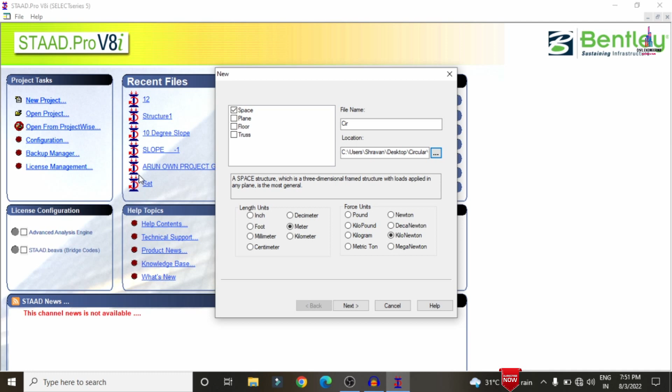Before that, initially we need to select the units, which are meter and kilonewton. Click on next. Now we have to select the add beam command. Click on finish. Now the grid lines will open in STAAD.Pro V8i, consisting of 10 grid lines in the horizontal direction as well as 10 grid lines in the vertical direction.

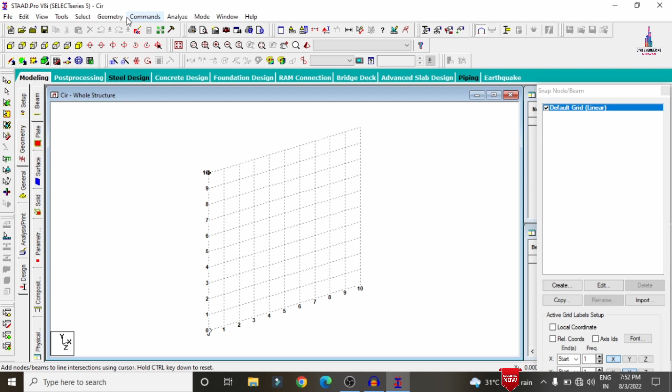Firstly, we need to model the 3D model for the building structure. Go to the geometry option, click on run structure wizard. Select the model type, frame model. Select the bay frame. Initially I am assuming the length of the building is 15 meters. For the height, I am selecting a G+7 building model consisting of 8 stories, 8 multiplied by 3, which is 24 meters. So height is 24 and width is 12 meters.

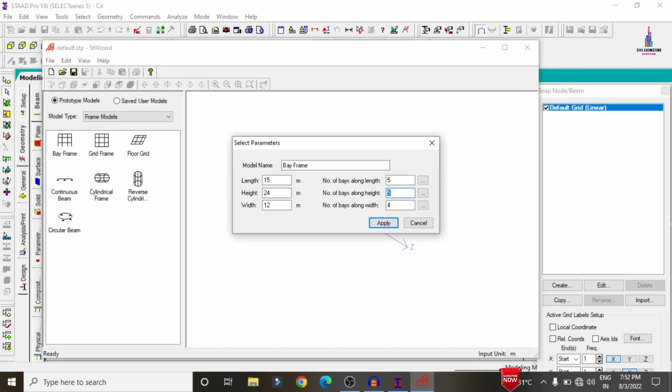The number of bays along the length direction will be 5, these are 8, and again these are 4. Click on apply so that the 3D skeleton model will open like this. Now we have to import this model to STAAD.Pro from the structure wizard. For that, click on cancel, then click on yes, click on OK. Now we can see the model was imported to STAAD.Pro like this.

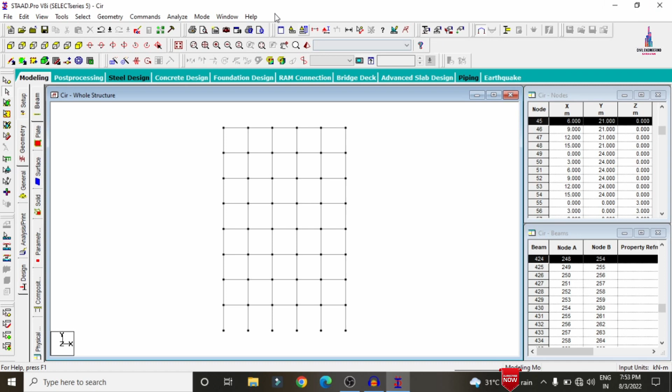Before applying the load cases, we need to add the slab section for this structure. Firstly, click on the front view option. Go to the cut section command. I am selecting the top. Click on the selective view option, click on OK. Here I am selecting this portion of the building structure. Now I am adding the slab section for this.

For that, select add 4-node plate. You can add with the mesh also. I am selecting the mesh option to add the plate cursor. Select the starting point, second point, third point, and the fourth point. Again I am coming to the first point like this. Select any type of mesh depending on your loading distribution condition. Here I am selecting the quadrilateral meshing option.

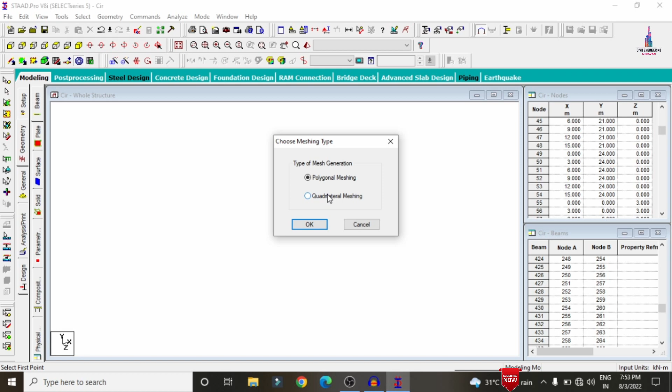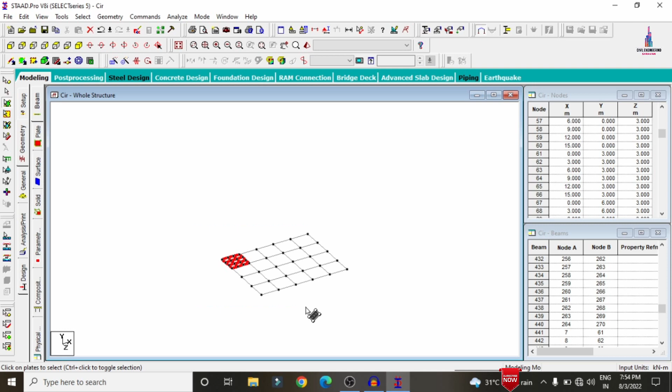Click on OK. We have to select the number of bays or divisions required for the mesh. I am selecting 3, 3, 3, 3. Click on apply so that it applies the 3x3 mesh property for the slab. In the same process, we have to copy this mesh to the X direction as well as the Z direction. Select this section, click on the translational repeat option. We copy in the X direction for the remaining 4 steps, selecting 4, of 3 meters. Click on OK. Now in the same process, we have to copy to the Z direction.

Further select all the property of the slab. Click on this particular option, select in Z direction, which is consisting of the 3 numbers, each will be consisting of 3 meter. Click on OK so that it will model this respective structure here like this.

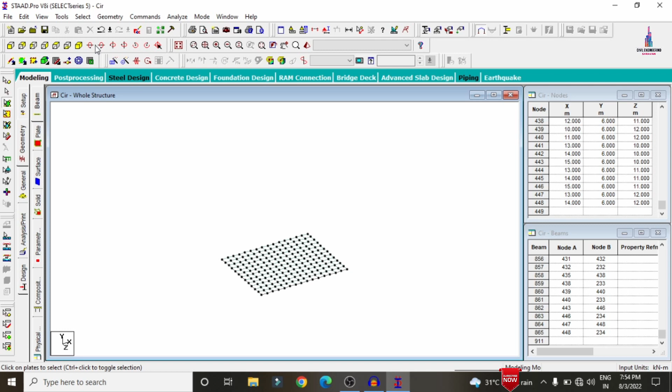Now we have to copy these properties to the height direction. Select this slab section, select this particular portion. We have to copy this slab to the remaining steps, which is of 1, 2, 3, 4, 5, 6 here.

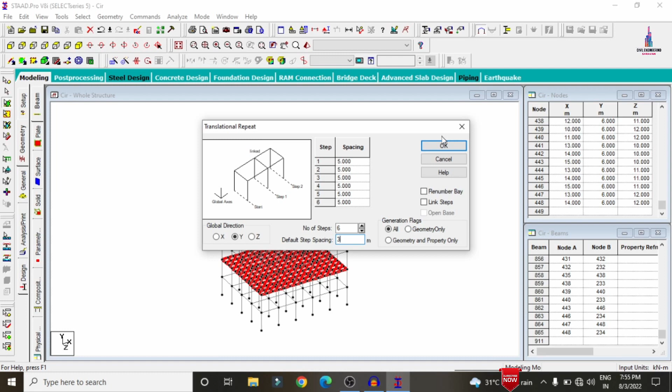Go to click on the translational repeat, Y direction. Number of steps are consisting of 6 numbers. Each step will be consisting of approximately 3 meter. Click on OK option. Now you can see it was copying the slab section to the remaining stories here like this.

Okay. So after modeling process completed, I will show you the 3D model which is done with the skeleton model. So click on the 3D rendering view option. This is the 3D rendering view which is loading. So this is a 3D rendering view for the structure.

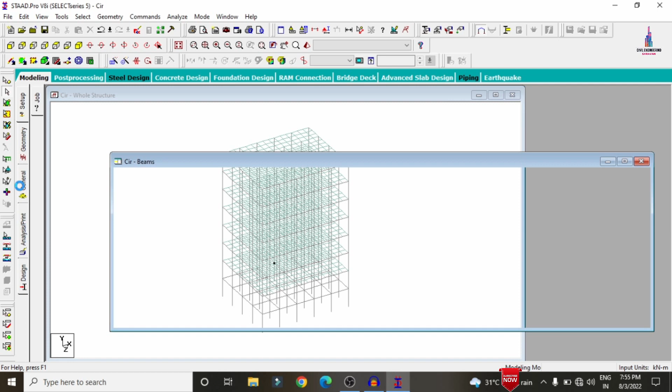Now we have to add the property which is related to the beam size, column size, slab thickness, etc. for the building structure. For that reason, we need to go to the general option here, and we have to click on the define option on the right hand side section. It will be consisting of the property assignment which is related to the circular, rectangular, T-section, trapezoidal, general, tapered I, tapered tube, assign profile. Just I am selecting the circular which is consisting of the column.

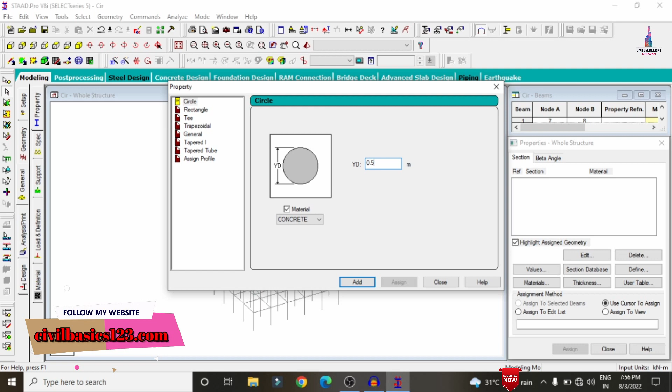Just I am selecting the diameter of the column will be consisting of 0.5 meter. Click on add option. Again in the same process I am selecting the rectangular beams which is consisting of approximately 0.5 cross 0.23. Just I am selecting the YD is approximately equal to 0.5 and this distance I am taking here as 0.23. Click on the add option, close option.

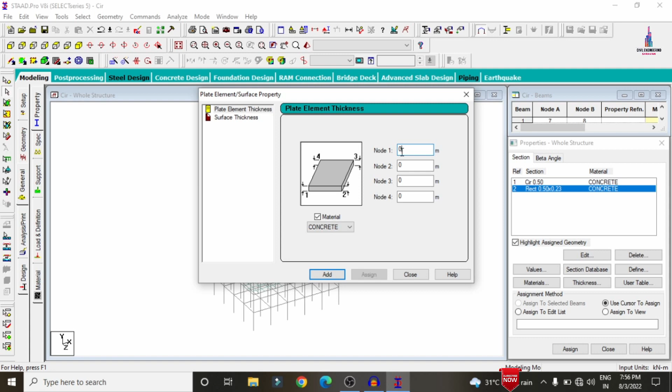Select the thickness option and we have to give the thickness of the slab. Just I am taking here as 150 mm. Click on close option. Select the circular column, go to select option, beams parallel to Y direction condition which is nothing but the vertical direction condition. Assign to selected beams option, assign option, yes option. So that it will assign the R1 property for the vertical member.

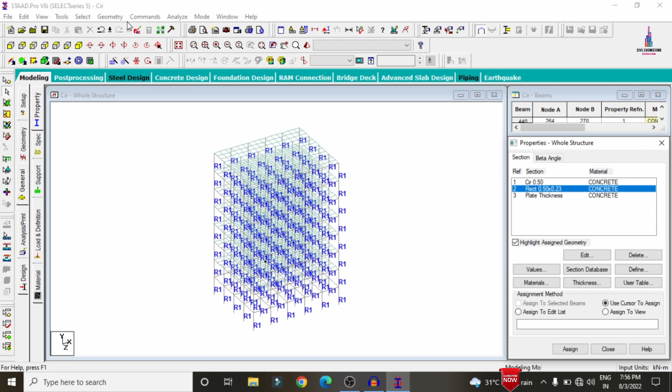Select the rectangular section which is of the beam, go to select option, beams parallel to X direction. Again I am selecting beams parallel to, let us consider, go to select beams parallel to Z direction condition. Click on assign to selected beams option, assign option, yes option.

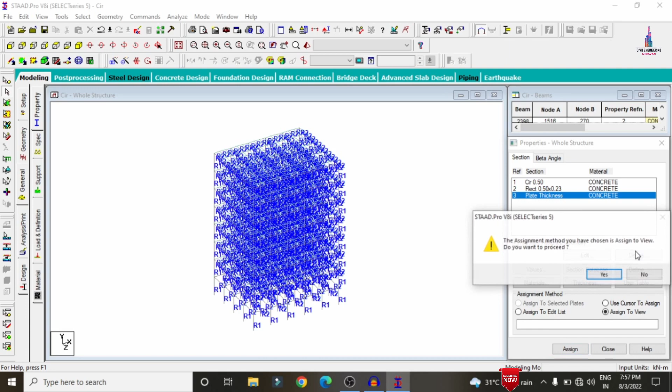Then after that we have to assign the plate thickness. Go to select this by using assign to view option. Click on the assign option, click on yes option, so that it will assign the plate thickness for the building structure. Now we have to see this model in rendering view again. Click on the 3D rendering view option. Now you can see it is loading the 3D rendering view.

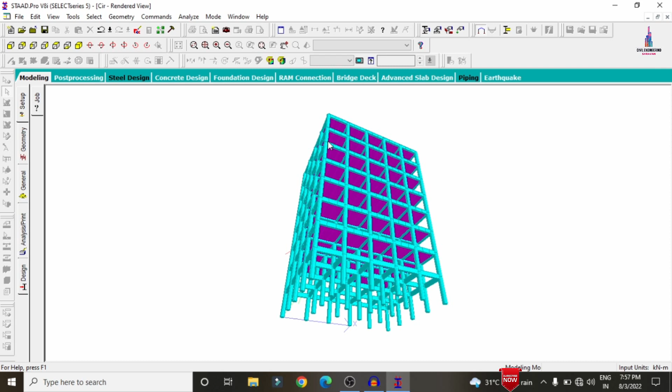This is the 3D rendering view for the building structure, which is consisting of the column size is approximately 0.5 diameter, 0.5 cross 0.23 beam dimensions, and slab thickness is approximately equal to 150 mm. So after modeling process completed, we need to assign the supports for the building.

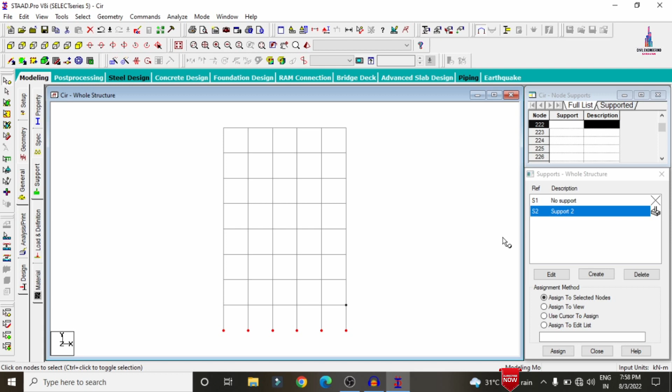For that, go to click on the general option, select the support option, click on the create option, add your fixed support condition, select support. With the help of the front view, select all the node points at the base. Click on assign to selected nodes option, assign option, yes option.

Now we have to apply the load cases for the building structure. Before that, we need to define the load cases according to seismic loading consideration and wind loading consideration as per IS 875 and as per IS 1893 codal provision. For that, we have to go to the definition part which is available on the top right of the section. Click on the definition, select the seismic definition, click on add option.

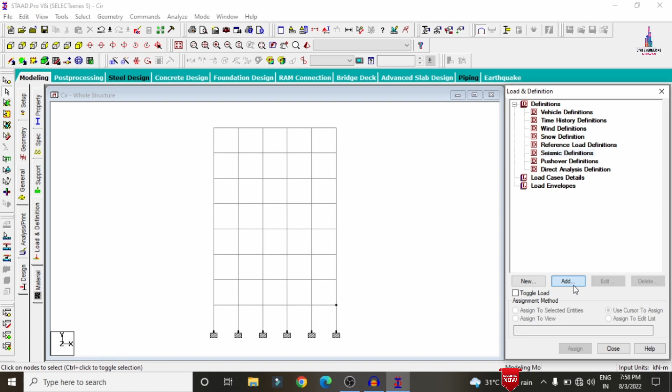So firstly, we have to select the code as per IS 1893 codal provision standard system. Click on the generate option. So firstly we have to select the zone which comes under the designing section. Just I am selecting the zone which is zone 5 seismic condition, otherwise you can select any one of the zone.

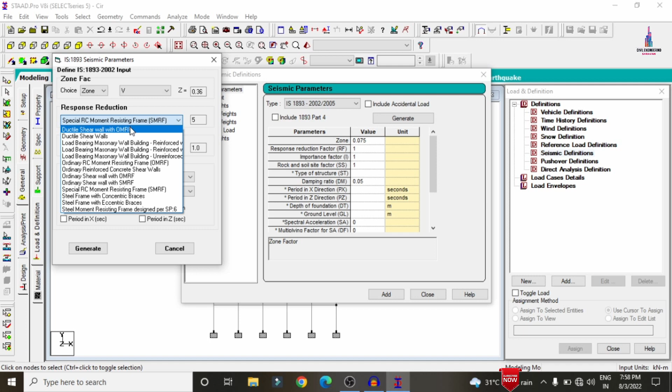So I am selecting here and select the response reduction factor for the special RC moment resisting frame. It will be consisting of the different types of the property, but here I am selecting special RC moment resisting frame. Importance factor will come under the general building structure which is of medium soil condition.

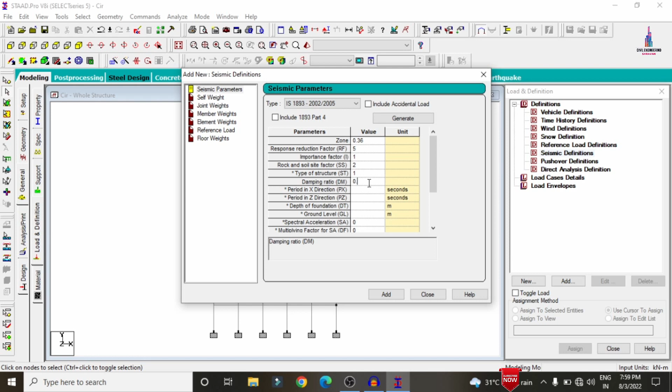Click on the generate option so that it will generate the property which is related to the seismic zone factor, response reduction factor, importance factor, rock and soil type. I am giving the damping ratio as 5%, which is 0.05. Click on add option. Now we have to add the self-weight condition system.

Click on add. After that we have to add the member weight, which is a uniformly distributed loading condition. So we need to consider the uniformly distributed loading condition which comes under the wall loads. Basically we will calculate the external wall. With the help of the external wall thickness, we need to multiply this value with the unit weight of the brickwork, approximately equal to 20. We need to multiply with 20 and we have to multiply this value with each floor height, which is

3. Again, if you want to calculate the internal wall, we need to take the internal wall thickness. We need to multiply this value with 20. Again, we have to multiply this value with 3, which gives 7.5. In the same process, we have to calculate the parapet wall loading condition also. I am selecting 0.125 as the thickness of the parapet wall, which is of 1.2 meter height.

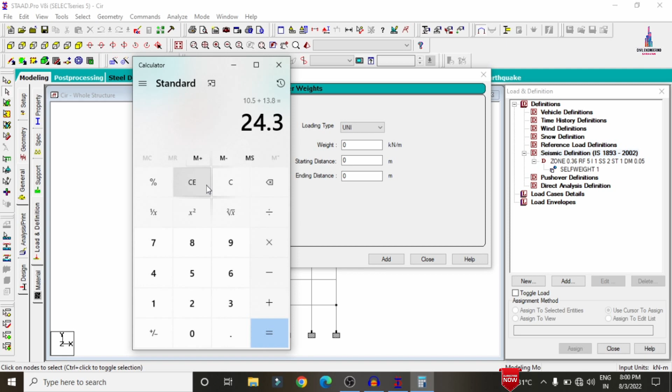We need to multiply this value with the unit weight so that it will obtain the value 3 for the parapet wall loading condition, 7.5 for the internal wall loading condition and 13.8 for the external wall loading condition. The summation of these values will be 24.3. So we need to enter the value 24.3 here. Click on add option. Now we have to select the uniform load which is 24.3.

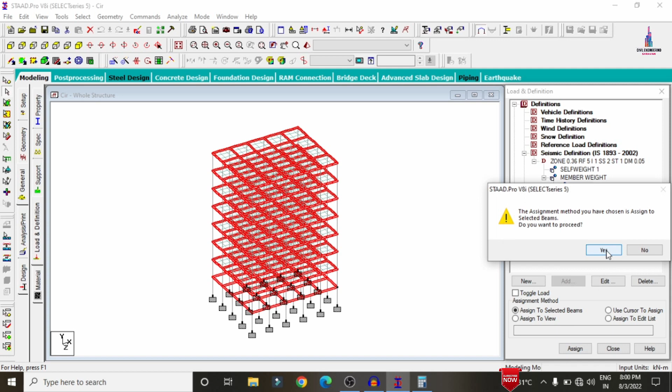Go to select beams parallel to X direction. Again I am selecting beams parallel to Z direction. Click on assign to selected beams option, assign option, yes option. After that we need to define the wind loading condition according to the consideration. Before that we need to measure the center to center distance for the building structure in the length direction, in the width direction, as well as the height direction.

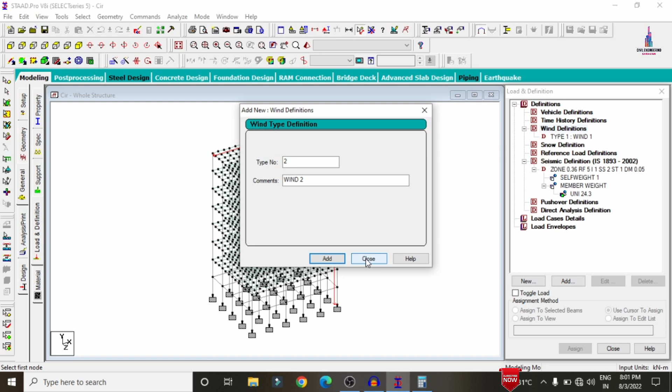Then after that we have to select the wind load definition. Click on add, select type 1 wind 1, click on add option, close option, select type 1 wind 1 here, click on add button. Firstly we have to generate this value according to the consideration, otherwise you can directly enter the value. I already explained how to calculate the wind loading condition according to IS 875 Part 3 code in my previous video. You can watch that particular video for the calculation part.

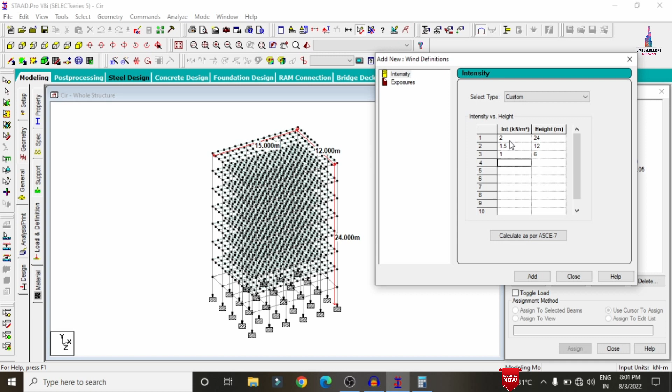So here I am entering the value according to my consideration. I am taking the intensity 2, which is acting at a distance of 24. I am taking 1.5 intensity which is acting at a distance of 12. I am selecting 1 which is acting at a distance of 6 here. Again I am selecting 0.5 which is acting at a distance of 3 meters here.

Click on add option. Select the exposure factor which is of value 1. Click on add. Again we have to close it. Select the exposure factor as 1 by using assign to view option, assign option, yes option. So after that we have to define the load cases. Go to the loads and definitions option, click on add option.

Initially we need to add the seismic loading condition, which is earthquake load in X direction. Click on add. Again I am selecting the earthquake load in Y direction. Click on add. Select the load which is related to the wind loading condition. I am selecting the wind load in X direction. Again I am selecting the wind load in Y direction.

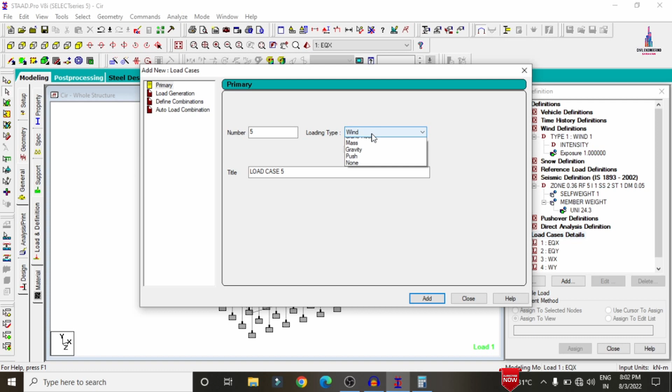Select the load which is the dead loading condition. Select the DL option, add button. Again I am selecting the load which is the live loading condition. Click on LL option, add option, close option. Select the earthquake load in X direction. Click on add. Select the load which comes under the seismic loading condition according to your consideration and X direction with factor as 1, add option, close option.

Select earthquake load in Y direction, click on add. Select the seismic loading condition from this input. Select the direction as Z with factor 1, add button, close option. Select the wind X, click on add. Select the wind load which acts in the windward facing direction with factor 1, add option, close option. Again in the same process I am selecting the wind Y, click on add option.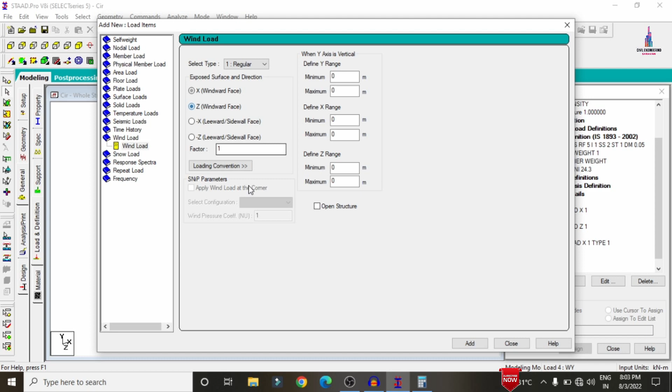Select this respective wind loading direction, which is Z direction, windward facing only. Click on add option, close option. Select the dead load. Under the dead load we need to add the self weight initially, which is Y direction -1 factor. Then after that we need to add the member loads, which is a combination of all the loads of the walls, which is 24.3, acting in Y direction.

Click on add. After that we have to enter the floor load. I am selecting the floor load, with an intensity for the floor of -2, acting at a distance of 3 meter as well as 24 meter. But here 3 meters is not an important value; we have to consider 6 meter. Why? Because our first slab exists at 6 meter height. Click on add, close. After that we have to select this self weight and assign to view, yes option.

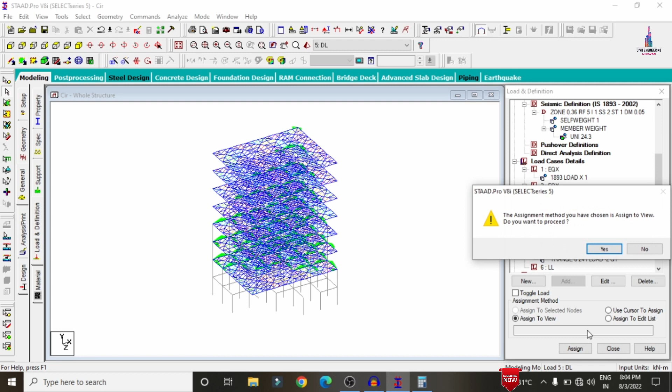Now we have to select the wall loading condition. Select the uniform load. Go to select option, beams parallel to X direction. Again I am selecting beams parallel to Z direction. Click on assign to selected beams option, assign option, yes option.

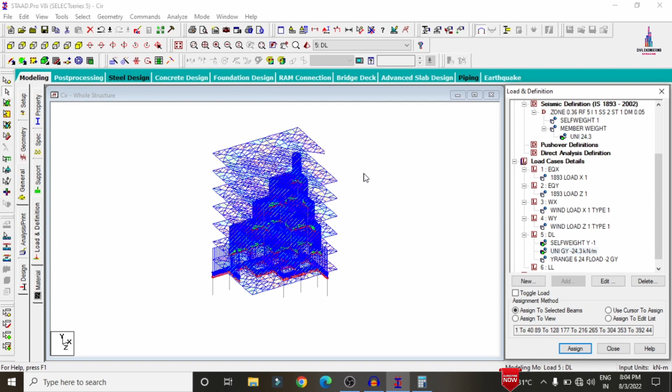Then after that we have to select the live load. Click on add option. Select the floor loading condition here. For the load, I am selecting -3, acting at a distance of 6 to 24 here. Click on add option, close option.

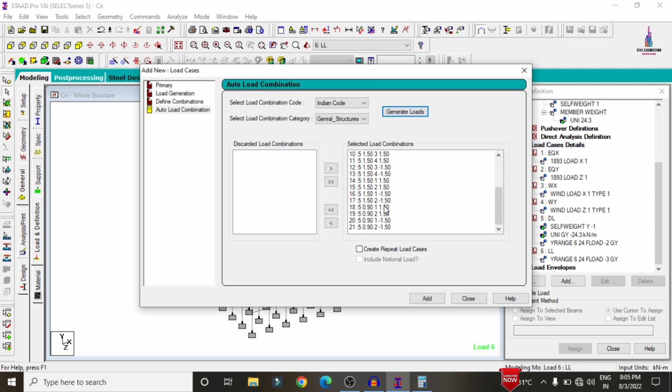Then after that we have to add the load combinations. Click on add option. Select the auto load combination according to the Indian standard provision. According to the Indian standard, click on generate option so that it will generate the load combinations like this. Click on add option, then click on close option.

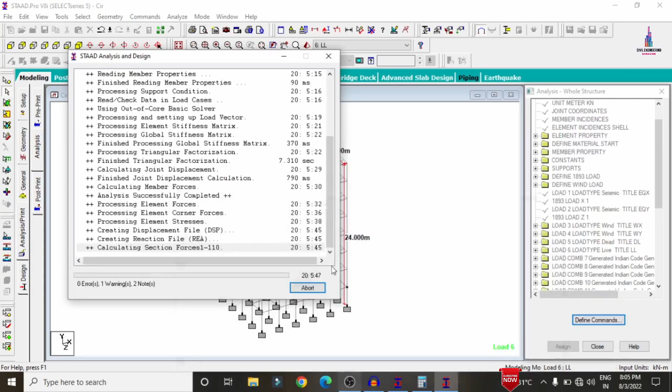Now we have to select the analysis and print option. Add no print, close option, analyze option, run analysis option, save option, so that it will do the analysis process according to the load cases. Now we can see my model is checking for 0 errors. The model has completed the analysis process. It is obtained with 0 errors.

Go to post processing mode option here, click on done option. Firstly, we have to apply the load cases that you need output for the building structural analysis results. Click on apply option, click on OK. Now we can see due to the live load, it is deflecting like this. You can select any one of the loading combinations, depending upon your consideration, so that it will display the green color diagram, which is the deflection diagram. This is the deflection diagram.

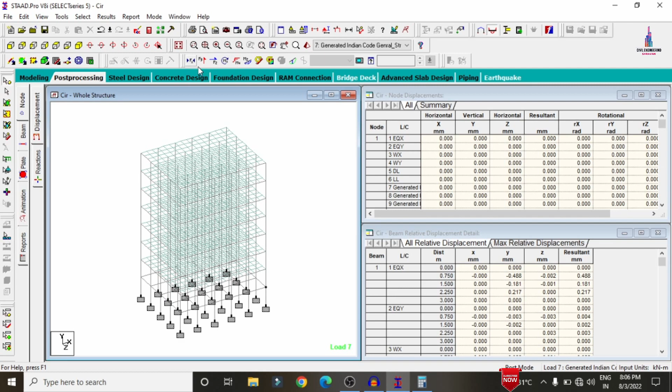In the same process, you can select the shear force diagram. I'm selecting the Fy value. This is the shear force diagram for the building structure. In the same process, I'm selecting the Mz value. This is the bending moment diagram for the building structure. Then we have to select the plate pressure distribution diagram. Click on the plate. Select the stress type as absolute pressure. Click on apply, click on OK. This is the plate pressure distribution diagram for the building according to the 7th load combination.

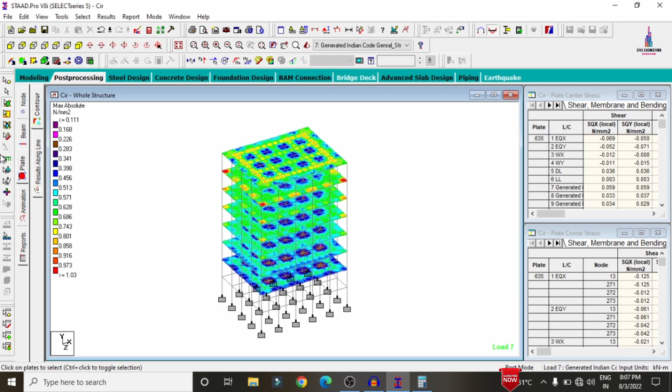After the analysis process is completed, we need to design this structure. Go to modeling option for that. Click on design option. Select the concrete design. Select IS 456-2000 codal provision. Click on select parameters. Firstly, we have to deselect all these parameters. Then we select the compressive strength, yield strength of shear reinforcement, maximum main, maximum secondary. Click on OK option. Now we have to select the define parameters option.

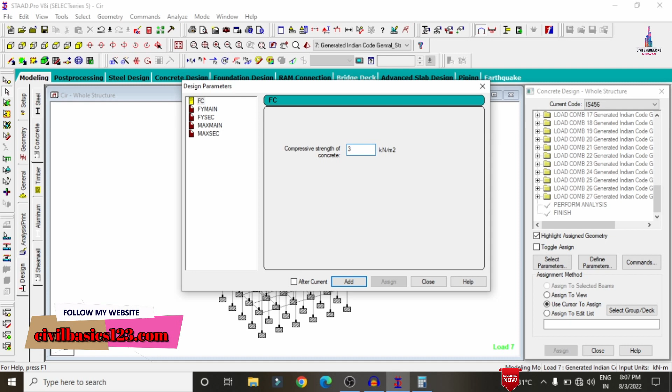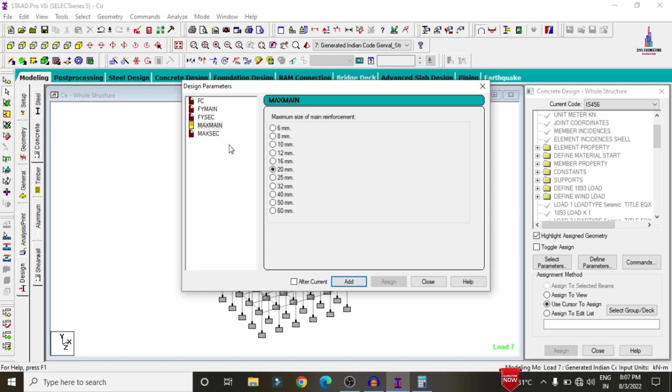I'm selecting the grade of concrete, M30 grade concrete, 30,000. Click on add option. Select the Fy main. I'm selecting 500 HYSD bars, 500,000. Click on add. Again I'm selecting shear reinforcement, which is also 500 grade, 500,000. Click on add. Select maximum main, which is 20 mm diameter bar. Click on add. Maximum secondary, which is 12 mm diameter bar. Click on add option, close option.

Select the commands option. Select design beam. Click on add option. Select design column. Click on add option. Select design element command. Click on add option. Select takeoff command. Click on add option, close option. Now we have to select the question marks.

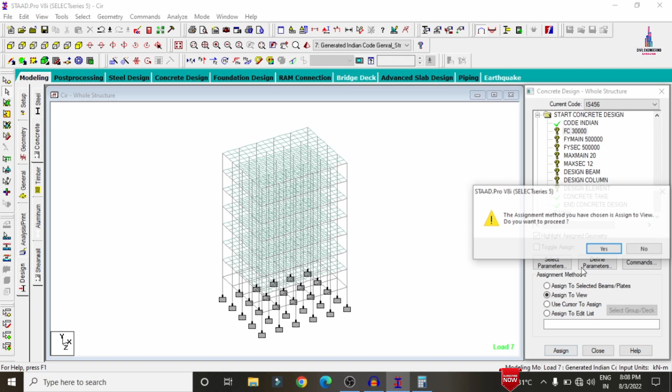Select FC by using assign to view. Assign yes option. Select Fy main by using assign to view. Assign yes option. We need to select a secondary reinforcement. Assign to view. Assign yes option.

Select maximum main, which is of 20 mm, by using assign to view. Assign yes. Maximum secondary. Assign to view. Assign yes option. Select design beam. We need to select the beams which are parallel to x direction condition. Again the beams which are parallel to z direction condition. Click on assign to selected beams.

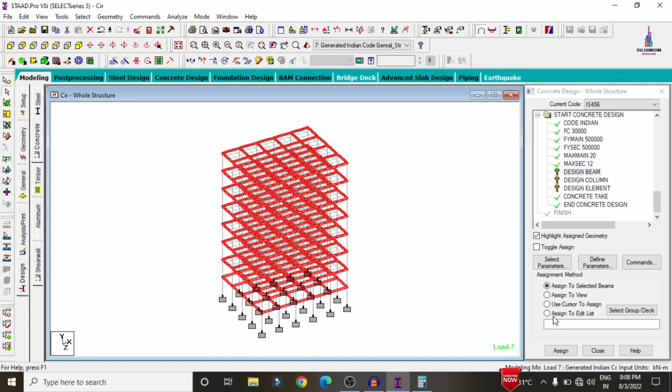Assign yes. Select design column. Go to select option. Beams parallel to y direction condition. Click on assign to selected beams. Assign yes. Select design element by using assign to view. Assign yes option. Now we have to select the analysis and print. Add your no print option.

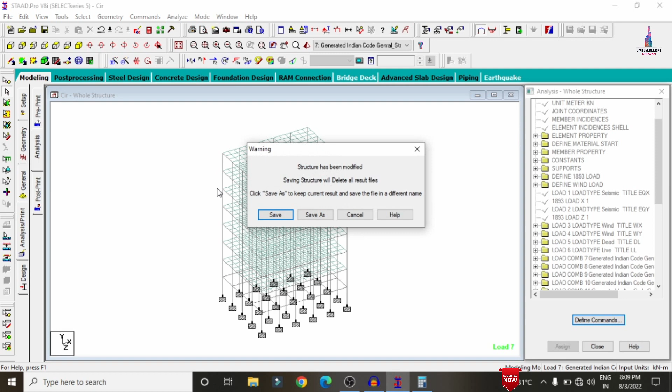Close option here. Go to analyze option on the top. Run analysis. Save option. So here we have to check for the zero errors again for the designing consideration as per IS 456-2000 codal provision standard system for the circular column and building. Here the model was obtained with zero errors again, but the warnings are showing 1030. Okay, so if you want to decrease the warnings for the building structure, you need to increase the dimensions of the column or beam according to your consideration.

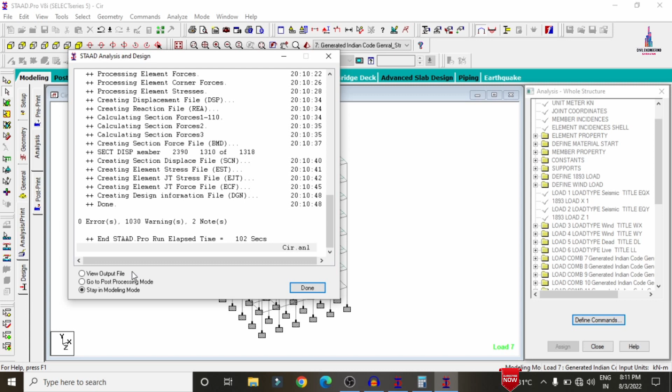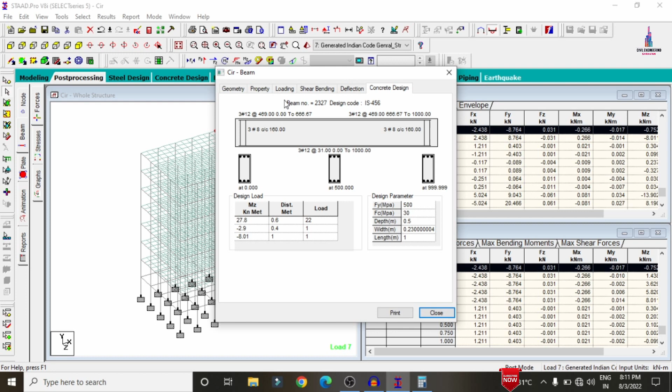Just I'm selecting the post processing mode. Click on done option. Deselect the deflection diagram here. Just I'm selecting the beam option on the left hand side. So deselect the bending moment diagram. Select any one of the beam. Just I'm selecting this corner beam. Double click on it. Click on the concrete design. Now we can see for this respective property of the corner beam, it is required 3 bars of 12 mm diameter at the top reinforcement section. Again 3 bars of 12 mm diameter at the bottom reinforcement section.

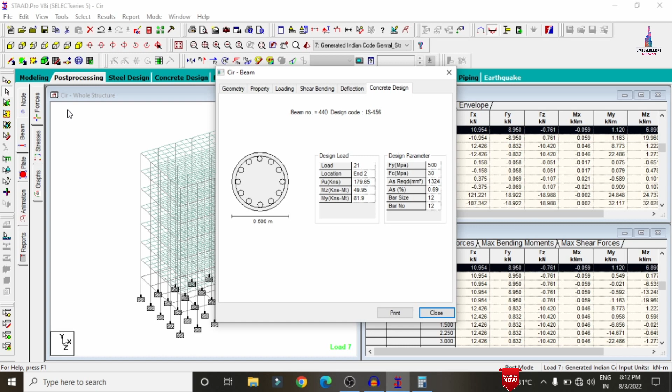In the same process, I am selecting the column here. Click on the concrete design. It will show you the concrete design for the building structure according to your consideration. As per M30 grade concrete provision, Fe 500 grade steel, it is required approximately 12 bars of 12 mm diameter bar which is placed in the circular portion for the building structure here like this. In the same process, you can check the reinforcement values here according to your consideration.

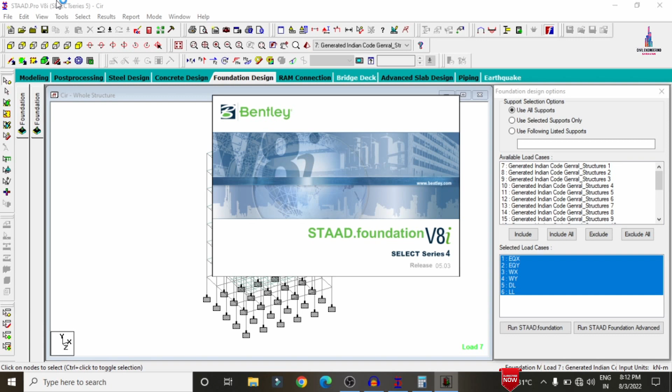So after designing the beam and column, we need to design the foundation. Click on the foundation design option. Select the load cases which come under the seismic, wind, dead load, live loading. Click on include option. Directly click on the run STAAD Foundation option. The fixed supports which are related to the circular column and buildings will be directly imported to your STAAD Foundation software. In the STAAD Foundation software, you can easily design the foundation according to your IS 456-2000 codal standard system.

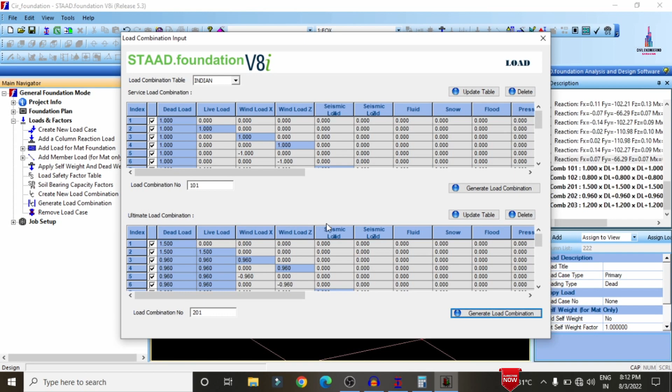Just I am selecting the loads and factors initially. Click on the generate load combination. Select Indian Standard Code. Click on the generate loads option for the service load combination initially. Then after that, we have to click on the generate load combination for the ultimate load combination system. So we have to click on the OK option again.

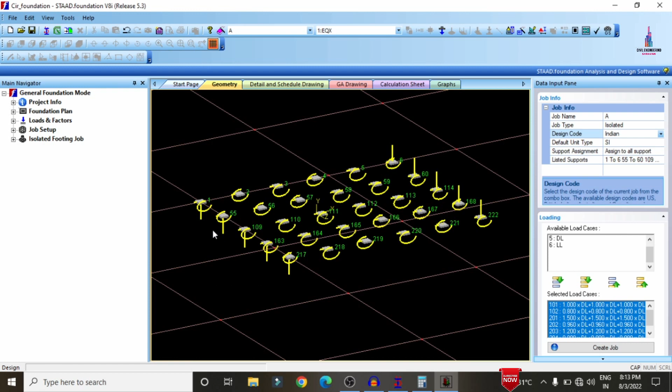Now we have to select the job setup option on the left hand side. Create job option. Select the job name. Just I am giving the name A, which is of isolated footing. We need to consider as per the Indian Standard System Code. Assign to all supports. We need to select the combination which comes under this property. So I am selecting here. Click on the create job option so that for all the combinations which are added, the isolated footing design will be open on the left hand side. Click on the design option here.

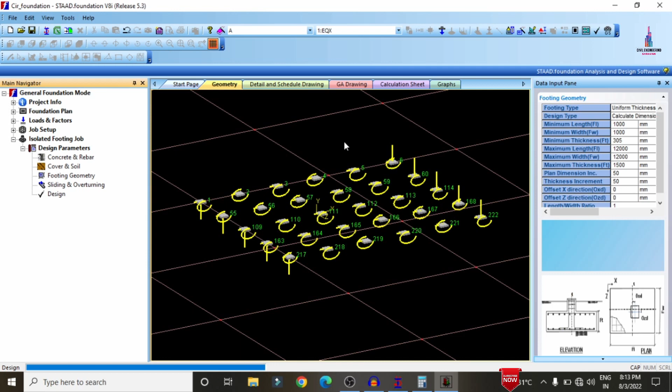Click on the concrete and rebar, cover and soil type. Just I'm selecting the bearing capacity of the soil as approximately 200 here, and rest of the values just I'm keeping the same. Okay, so again click on the analyze option here. Click on the yes option so that it will design the isolated footing according to your IS 456-2000 codal provision standard system. Click on any one of the foundations so that it will show you the complete reinforcement design results which come under the isolated footing.

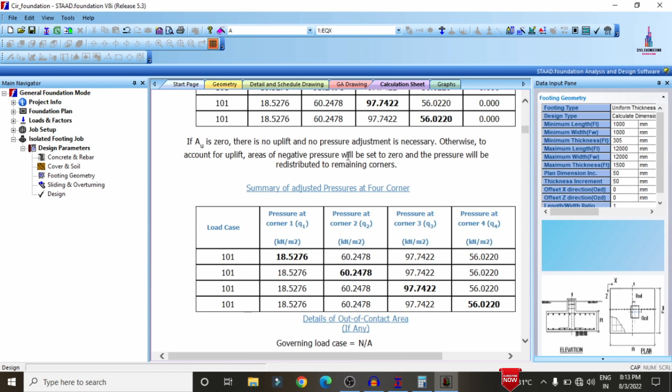This is the geometry, this is the details and drawing which consists of the complete reinforcement details of this particular foundation. This is the GA drawing, this is the calculation sheet. This is the complete process of analysis and designing of circular column and buildings by using STAAD Pro V8i software.